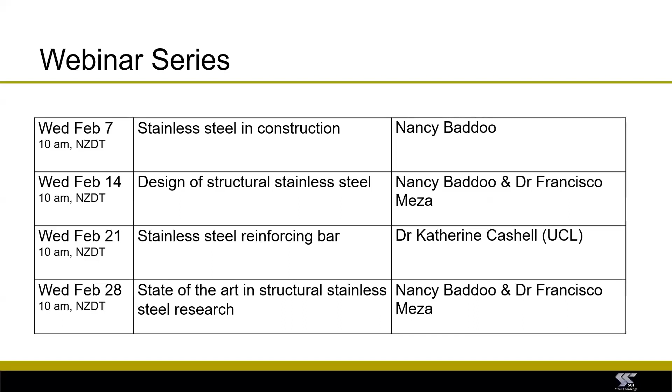A lot of what I say today you can access free of charge in the Design Manual for Structural Stainless Steel. It's written as a sort of amplified Eurocode handbook, and I know you may not be familiar with the use of Eurocodes, but a lot of the information in this guide is generic, and I think you'll find it useful. Next week I'll be talking more about the American and European design standards, and I'll bring to your attention more design tools and design information.

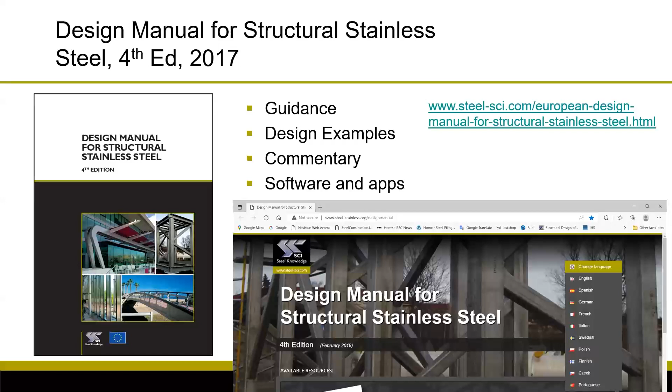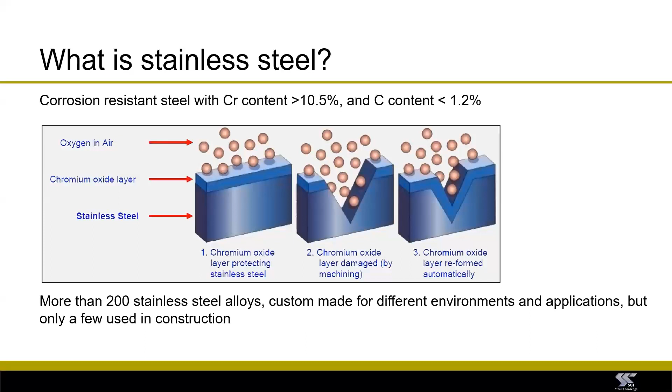Let's explain what stainless steel is. It's a family of corrosion and heat resisting alloys of steel. There's a wide range of them. In fact, you're never far away from stainless steel, whether you're in the office or at home. Stainless steels have a range of strengths, corrosion resistance, and other interesting properties. But what all stainless steels have is at least 10.5% chromium content. With that 10.5%, you get a tightly adherent layer of chromium oxide, which clings to the surface of the steel and protects it from corroding when there's moisture and oxygen. If you damage the surface by scratching or whatever, the chromium oxide reforms instantaneously.

And that's what makes stainless steel protected from corrosion. All these stainless steel alloys are grouped into 5 distinctive families that have different microstructures and mechanical, physical properties, and different corrosion resistances in various service environments. The families have different alloying combinations. We've just seen that great video on nickel—nickel is useful because it improves the formability and weldability of stainless steels. You also need chromium, and molybdenum and nitrogen, to increase corrosion resistance.

So let me quickly run through these 5 families. Austenitics are the most important for today—they're very ductile and reasonably strong. Your kitchen sink will be made of austenitic stainless steel; it's readily welded, and they work harden, so the strength increases as they're worked. Duplex—now this isn't a layer, duplex is actually the microstructure. It's a mixture of austenite and ferrite. These are stronger than austenitics, but not as easily formed.

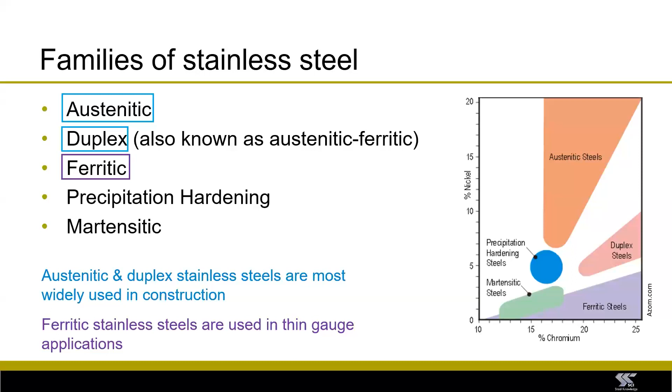The families used in construction are mainly the austenitic stainless steels. Duplex stainless steels are being used more and more now, and ferritics also find some applications. I've summarized this in this slide. The austenitics, as a family, give a wide range of corrosion resistance. Interestingly, the austenitic stainless steels are not magnetic, which you wouldn't necessarily expect. And with duplexes, you'd think about using one if you've got an application where you can exploit the higher strength—so not if your design is limited by serviceability or deflection, but if it's limited by strength, then a duplex stainless steel would be good to consider.

And as you would expect, the higher the alloy content, the more corrosion resistant the steel, and the higher the cost.

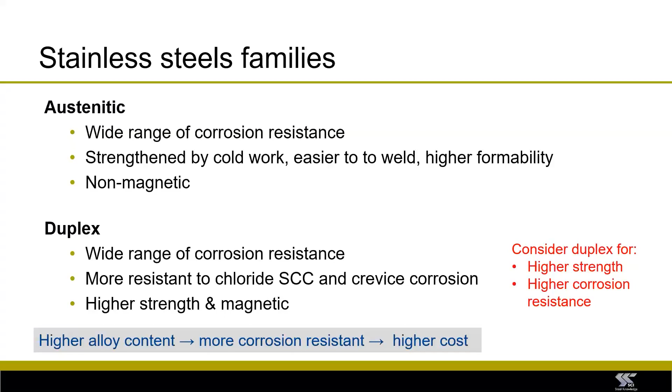On this slide, I am suggesting the reasons for using stainless steel in structures. Clearly the most common reason is if your structure is in a highly corrosive environment, or where it's important to have a long life with low maintenance requirements. Perhaps you've got an application where you really don't want a painted coating for corrosion protection, or a certain attractive aesthetic appearance is needed. Those are all reasons for using stainless steel in structures.

The less widely known reasons include if you need a non-magnetic steel, as I've mentioned, in some medical and defense applications, that's important. Also, if you need good toughness at very low temperatures, then the austenitic stainless steels are a wonderful choice. And finally, I'll show you in a few slides' time that the stainless steels offer very good impact properties for high strain rate events.

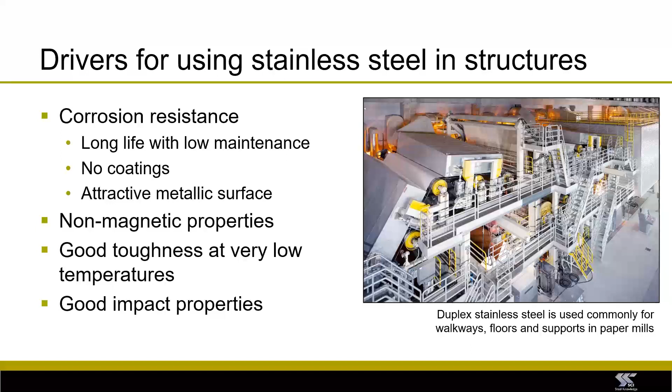We're going to go around the world now. I'm going to show you some applications. My main motivation is to show you the diverse range of applications you can find for load-bearing stainless steel components, large or small, hidden or on view to everyone.

Let's start with buildings and external structures. Perhaps you'll recognise the gap in Western Australia. That's a duplex stainless steel walkway. No need to wonder why stainless steel was needed there. Very exposed, salty environment. But this photo beneath that, you may be wondering why stainless steel would be needed.

That is because the columns for the canopy in front of the building need to have a very high impact resistance to prevent the possibility of damage by vehicle impact. So that's a duplex stainless steel structure. And the rather beautiful canopy on the right, that's stainless steel, I think, was chosen because a very fixed and beautiful surface finish, reflective finish, was needed.

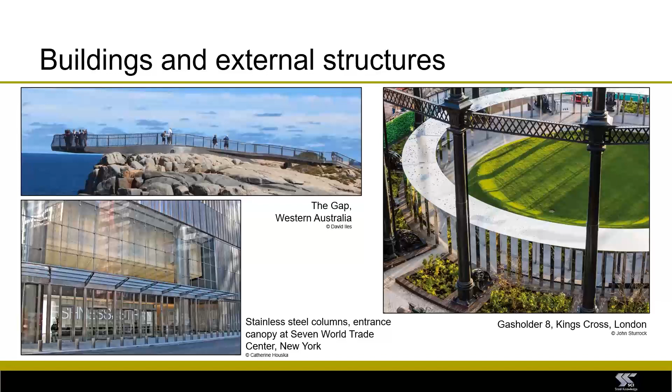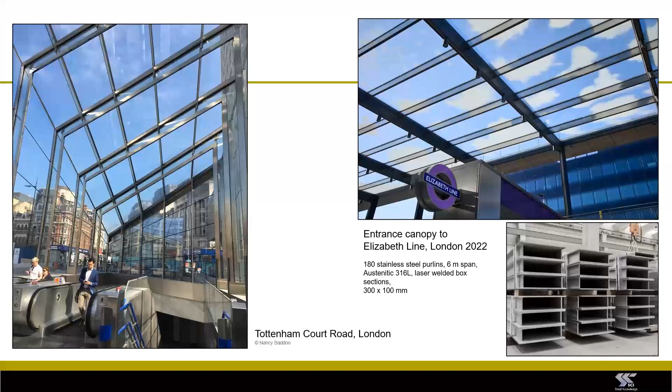And also whizzing over to the States. Here we've got 42 canopies for the Washington DC Metro, all using austenitic stainless steel. I like this because every canopy is slightly different depending on the requirements of the given station. And a modular design has been adopted. So the modules are bolted together on site and they're delivered in as large as possible modules as can be delivered. So they're rectangular hollow sections, and I think rather beautiful designs.

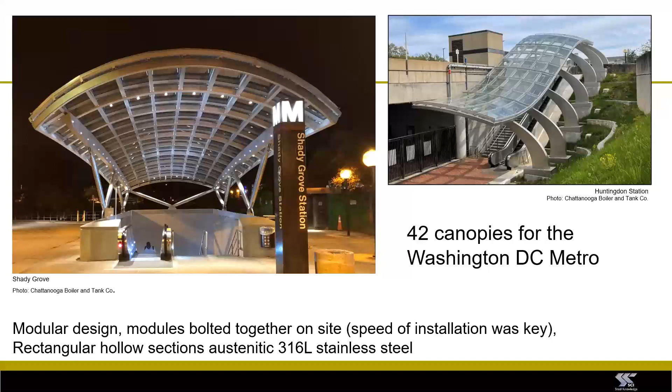I think they've commissioned more than 42 now, actually. Clearly, stainless steel is used for cladding high-rise buildings in very demanding applications. Here in Dubai, the environmental conditions can be quite extreme, strong winds, sandstorm, high salinity, and stainless steel performs very well here.

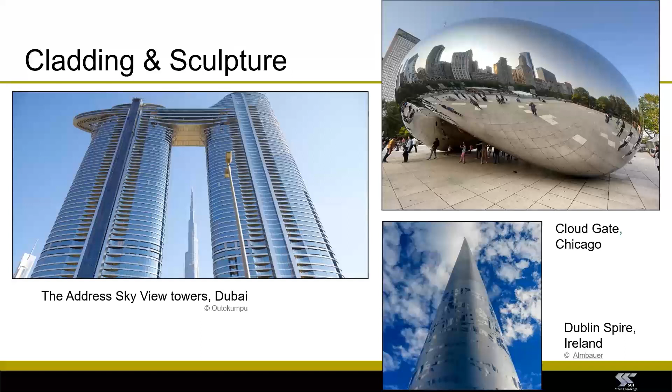And there are many sculptural applications of stainless steel too. But perhaps what you're most interested in today, I'm not sure, is industrial applications of stainless steel structures. So we don't see these every day, but the largest proportion of stainless steel goes into these types of applications.

I mustn't spend too long talking through these, but the photo on the top left, that's a biopharmaceutical production plant where all the sections are 304 stainless steel welded together. And you'd think, well, why do you need stainless steel? Well, because these clean factories, you need to carry out maintenance and inspection of the vessels, and there can't be a chance of any painted coating falling off. All the surfaces have to be very readily cleaned.

Then we have an industrial skid for machinery in the middle top, and then the top right is a desalination plant in London. And then along the bottom, walkways and platforms, lock and dam gates. And the bottom right is actually a nuclear plant, an AP1000 reactor, where you have this sandwich construction, stainless steel, concrete, stainless steel. That has been used quite a lot in plants in China and the States.

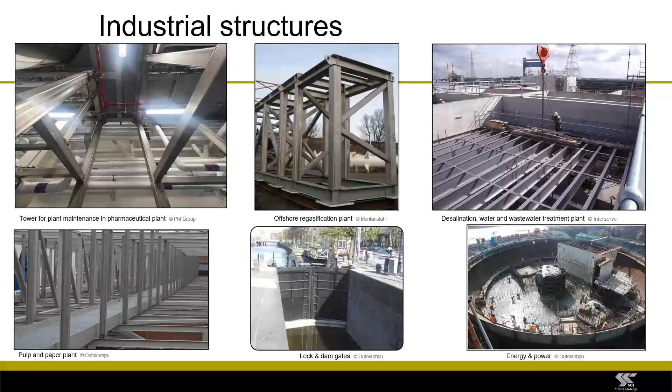What about the water industry? Well, just in November last year, we published an update to the information and guidance note on applications for stainless steel in the water industry. And although it's written mainly for the UK market, I think there's lots of really useful information about what stainless steels to use in what different environments that you would encounter in the water industry, and written by top experts in corrosion.

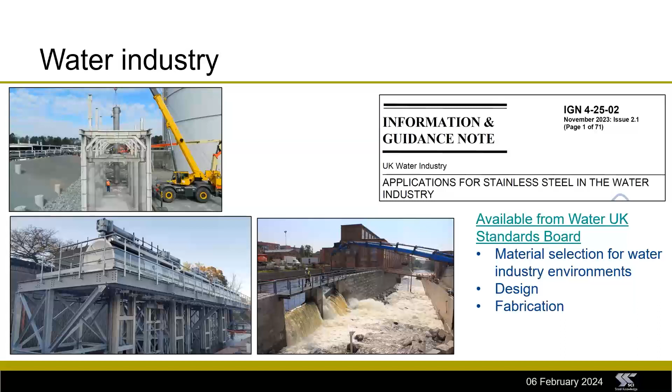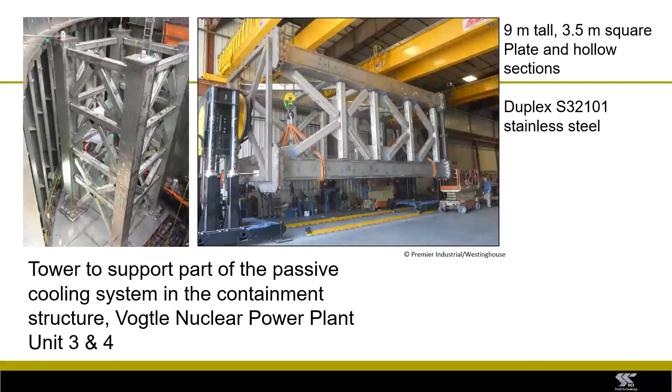Not me, I should hasten to add. I'm just a structural engineer. But if you are involved in the water industry, I suggest you download this publication, because there are lots of useful applications for stainless steel there. I just work with someone who was involved in rather impressive stainless steel tower there, pretty tall, 9 meters tall, 3.5 meters square, a duplex stainless steel.

Bridges. I'm going to talk at the end of this webinar more about bridges, and perhaps it's surprising to you to consider using stainless steel for such a large structure. But depending where your bridge is, it can actually save you lots of money using stainless steel and not having to do regular painted maintenance. More on that later. But there are examples of pedestrian bridges made of stainless steel, railway bridges, and also road bridges made of stainless steel.

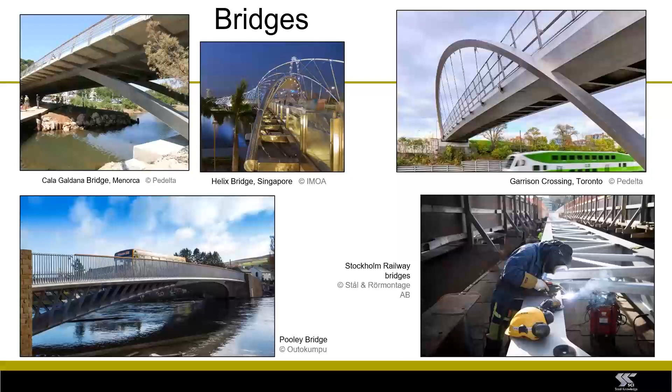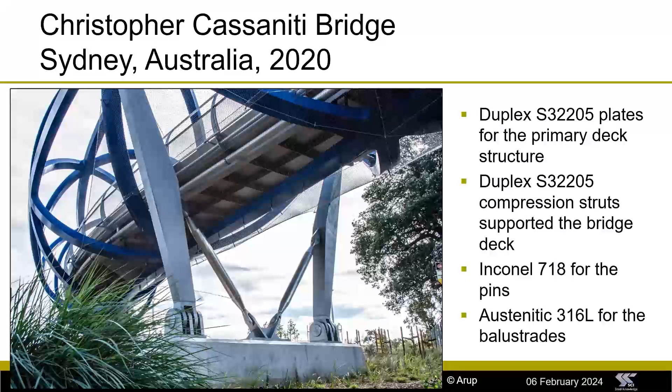And of course, I should show you a fairly new bridge in Sydney, Australia, which uses stainless steel in a few different ways. You can see there's plate used for the primary deck structure, and then the compression struts are also made of duplex stainless steel, and then a high nickel alloy for the pins with austenitic stainless steel for the balustrades. So that's quite a nice example of different stainless steel alloys.

But just in case you're worrying, thinking those bridges come along once in a lifetime, I'm not interested - just for regular bridges, stainless steel is being used. This is a road bridge somewhere in Sweden, not in a capital city, and lean duplex is being used just for a standard composite road bridge.

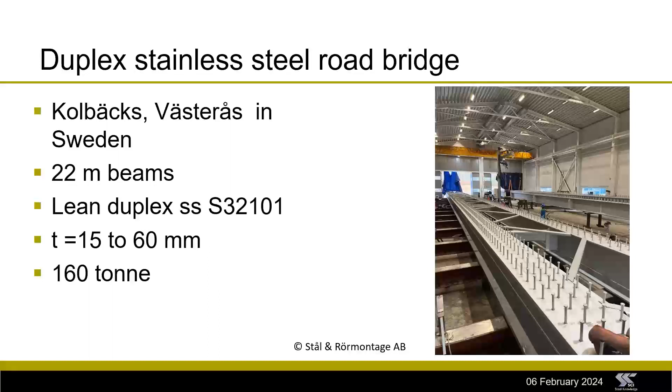And finally, on the applications, let me show you a wide range of fixings are used, because stainless steel is an important material for joining concrete, masonry, timber, aluminium, useful in renovation, repair, refurbishment, and reinforcement, all beginning with RE, fortunately. I think you'll have come across quite a few of these stainless steel products.

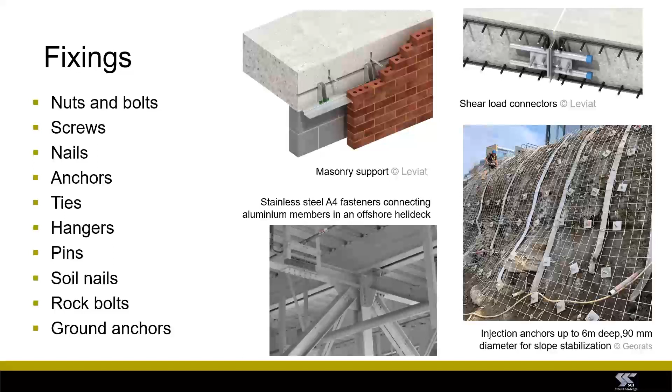Moving on to stainless steel properties now.

Here are the stress strain characteristics at the low strain. In red, carbon steel, clearly, sharply defined yield point, and then a plastic plateau. In green, I'm showing austenitic stainless steel, and in blue, duplex stainless steel. So you can see rather different stress strain characteristics. They exhibit strain hardening, which is when the strength increases with the plastic deformation. And it's gradual yielding, isn't it? A gradual loss in stiffness.

This behavior leads to differences in the performance of stainless steel beams, for example. The stiffness, modulus of elasticity, is very similar for carbon steel and stainless steel. And what we use in design, because there isn't a clear yield point, is the 0.2% proof strength, the strength at 0.2% strain. This is a conventional metric used for any metals that have non-linear stress strain characteristics like this. It's not something special for stainless steel - other metals like aluminium you would use the strength at the 0.2% proof strain. So that's what's tabulated in your product standards.

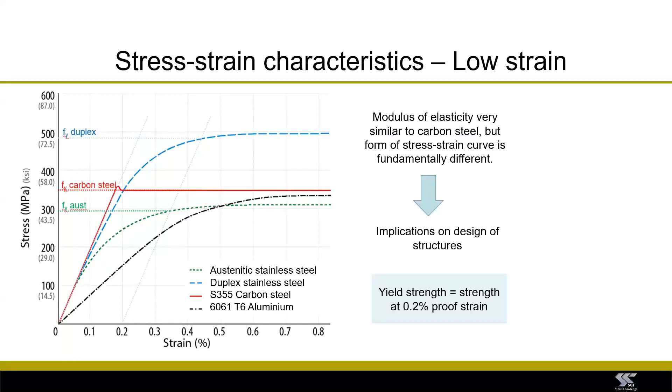These curves are the full range stress strain curves of stainless steel and carbon steel, and you can see that austenitic stainless steel is much more ductile than carbon steel, and it also shows greater toughness, which is compared to the area under the stress strain curve.

So stainless steels have better energy absorption properties than, for example, aluminium. They have a high rate of strain hardening and excellent ductility. I show this photo because the point is that the damage to the stainless steel rail cars was contained within a very localized area because of the good energy absorption properties.

So we'll think a little more in this webinar, but a lot more in the webinar next week, about the impact of these stress strain characteristics on our work as structural engineers. How do the design rules differ? And actually, can we use these characteristics to get more out of the stainless steel? Because it's more expensive, so we want to use it in the most efficient way possible.

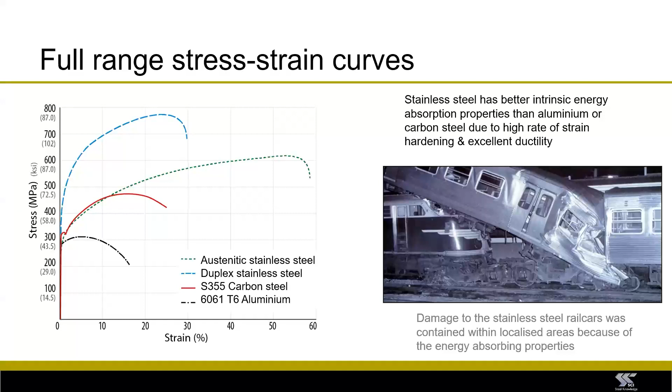On this slide, I've summarized the mechanical properties. For carbon steel, I'm comparing against an S355 carbon steel. Austenitic stainless steels have a lower yield strength, 0.2% proof strength, and the duplexes have a somewhat higher yield strength. The tensile to yield strength ratio, for carbon steel and duplex stainless steels, is pretty similar. For the austenitics, it's much higher, around 2.4. This is because of the strong work hardening. The elongation, again carbon steel and duplex are similar, and the austenitics have about twice as much elongation.

These properties are in the annealed condition. You'll hear this strange word a lot with stainless steel, but it's used to describe the properties in the softened state, they will never be lower than the annealed condition, and they'll more or less always be higher. If you buy some stainless steel plate, for example, it will be extremely surprising if the yield strength is as low as 220.

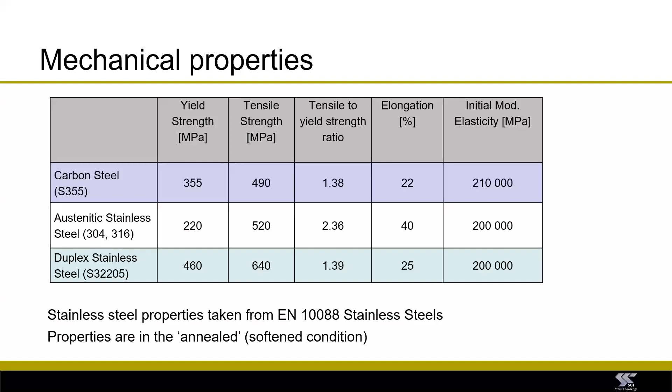Let's think about physical properties now. Here I've compared the thermal expansion and the thermal conductivity. The density is more or less the same, as you can see. For expansion, the austenitics have about a 30% higher expansion than carbon steel. So when you use carbon steel with austenitic stainless steel, you should take into account the differential thermal expansion in design.

Conductivity is different again. Austenitic and duplex stainless steel conductivity is only about 30% that of carbon steel. This is good and this is bad. Materials with low thermal conductivity prevent the transfer of heat, so this helps in achieving enhanced energy efficiency. For example, lower thermal conductivity makes stainless steel ideal for developing thermal breaks. But it's also a disadvantage, say, in welding, where you may get more distortion because the heat isn't conducted away as quickly or efficiently.

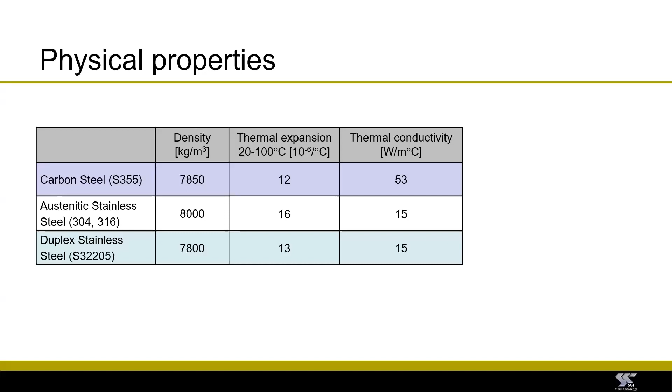Now let's finish off the properties section with this slide on low temperature toughness. I think what you'll notice is austenitic stainless steels actually show no ductile to brittle transition. Isn't that interesting? So you can use, and indeed they are used, right down to cryogenic temperatures, for example, for LNG containers.

Duplex stainless steels, just like carbon steels, have a ductile to brittle transition. It's similar-ish to carbon steels. There's been a lot of work on this recently because it's an important parameter to fully understand, and there is complete and comprehensive guidance now in the forthcoming Eurocode for duplex stainless steels on low temperature toughness.

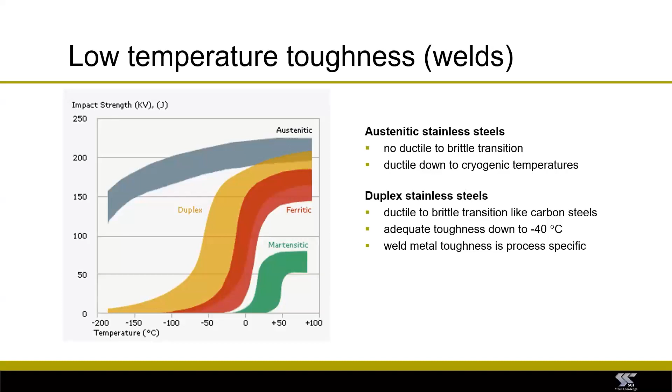Good. Now we're going to move to specification. And I want to try and explain the way stainless steels are named. This might look horrifying to you, but depending what product standards you're using, the same alloy will have a different designation system.

In Europe, for example, we use this number like 1.4301. Also, the European standards give this very complicated name for each alloy, but no one I know has ever used that, so you can forget that.

Now, in your part of the world, you would be using the American ASTM designation system, because I checked that in the Australian New Zealand standard 4673, which covers the design of cold form stainless steel structures. I checked how you designated your alloys, and for the austenitic alloys, this standard covers 304, 304L, 316, 316L. So these are there in red.

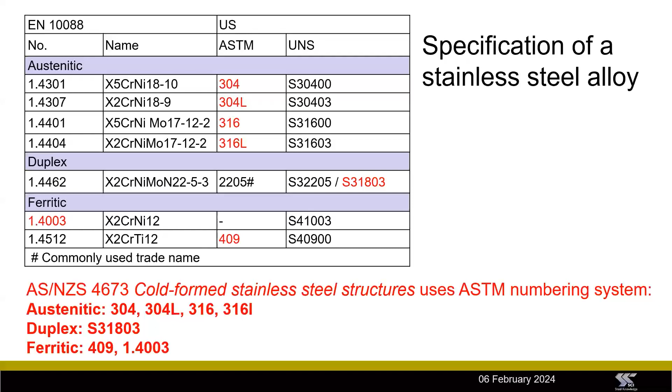And then your standard also covers the ferritic stainless steels, 2 alloys, 409, using the ASTM system, and it covers another ferritic alloy for which there isn't an ASTM. Actually, I'm not quite sure why, but it was decided to use the European number for that one. But anyway, hope that's all obvious to you. For this presentation and the rest of our presentations, we will be using the ASTM system.

When we use the term stainless steel grade or type, we mean an alloy, a chemical composition. We're not talking about strength. Now, this is confusing if you're familiar with American standards, because they talk about steel grade 50, and 50 is the strength, isn't it? It's 50 KSI yield strength. But that's not the case for stainless steel. When we use grade or type or alloy, we mean the chemical composition. And I try to use the term alloy, but forgive me if I drop back into grade.

The other thing I wanted to explain is what this L is up to, because you've already seen 304 and 304L. So L stands for low carbon. And low carbon grades used to have to be specified if you were going to carry out welding, because having a low carbon minimized the risk of a certain type of corrosion happening, sensitization. Now, these days, more or less all stainless steels that are made actually end up low carbon.

And so you see something called dual certification. You'll see the alloy written as 304, 304L, and that provides the material with the higher strength. 304 has a very slightly higher strength than 304L, and it has the lower carbon content of 304L. So what I mean is it's the best of both worlds. So don't be surprised if you see austenitic stainless steel dual certified like that.

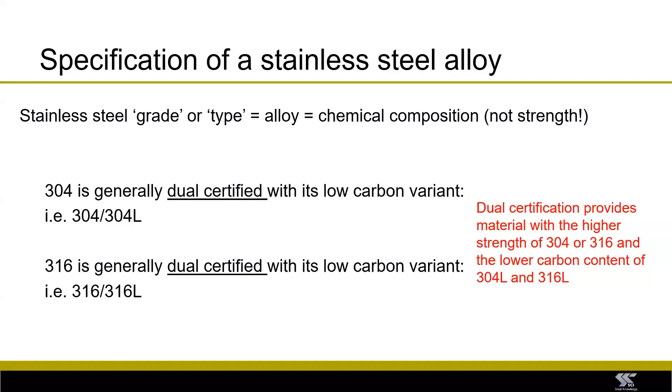The first thing you have to do is understand the environment. If it's atmospheric, what's the chloride salt deposition? Is it close to the sea? Are there de-icing salts? Are there other nasty pollutants? Is it washed by the rain? Or is it sheltered? Will it be cleaned?

If your application is immersed, what are the chemicals? What's the composition of the liquids? If your application is in an industrial process, are there sulfides? What are the other chemicals, etc.?

Once you've characterized the environment, then you need to think of your design requirements. What surface finish do you want? Will there be lots of crevices? What are the design details?

From that, you can move on to select your candidate alloy. And then, of course, you have to think, well, is this product actually available? And what's the lead time? So these are the decisions that have to be thought through before you get onto the structural engineering, before you decide, right, I've got a duplex, this is my 0.2% proof strength, let me get on with determining the buckling of this member.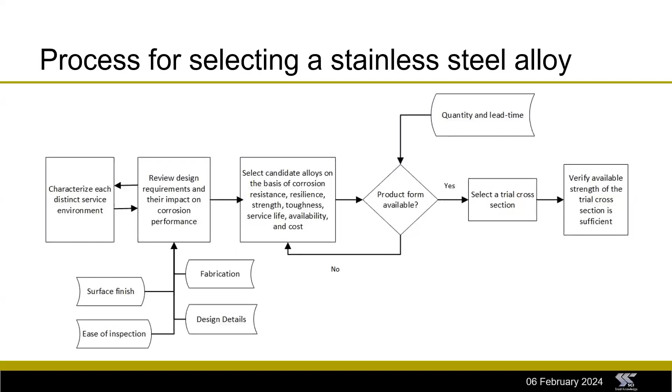Now, there's lots of guidance about how to select the right alloy for an application, and I've put a couple of ideas here. We'll talk more about the AISC standard next week. There's a very useful system on the IMOA website, the International Molybdenum Association website. Lots of very helpful guidance there too.

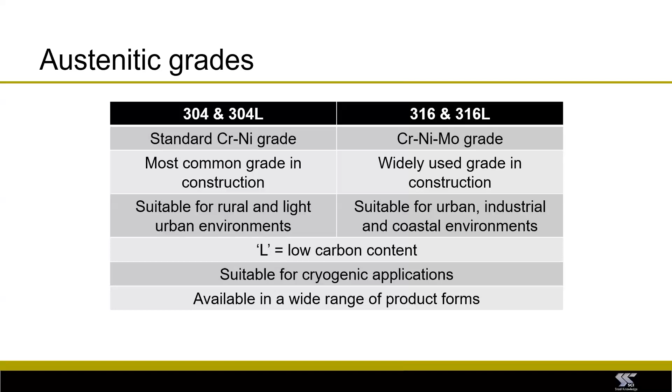Let me whiz through these just to highlight that the 304 alloys are the standard chromium nickel alloys. The 316 alloys have molybdenum, which makes them more corrosion resistant and more suitable for applications, for example, by the sea. Austenitics are widely available in a range of product forms.

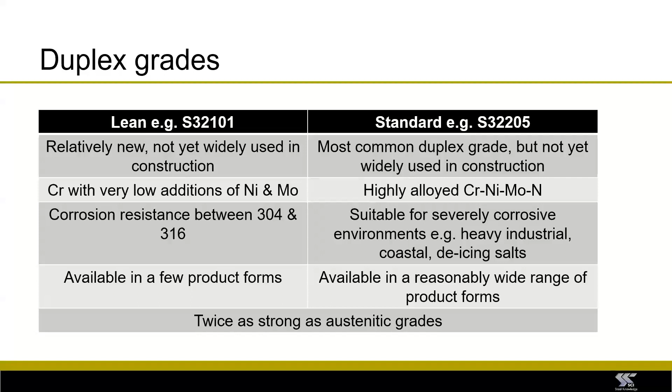The duplexes, we have the lean duplexes, which have lower alloy additions, that's why it's lean, and then we have the standard duplex. Standard duplex has been around for years and years in the chemicals industry, available in a wide range of product forms. The lean duplexes, in the last 10 years, have been found to be tremendously helpful, and they're increasingly used.

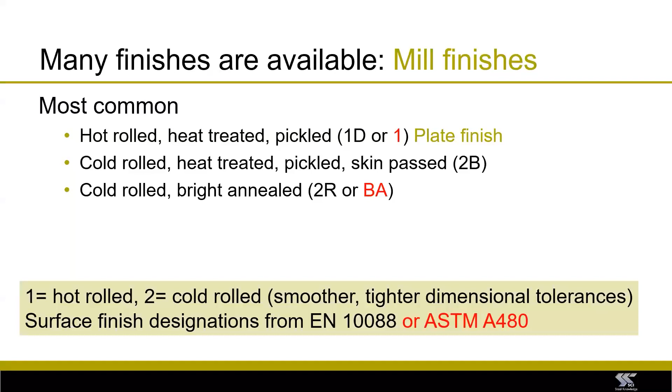A few thoughts on finish. Clearly, mill finishes, you have a 1D or a 1 finish on thicker products. If you've got thinner material, then it would generally be a cold rolled finish. These are all specified in the product standard. You can have special finishes, whether ground, right up to bright polished, patterned, coloured.

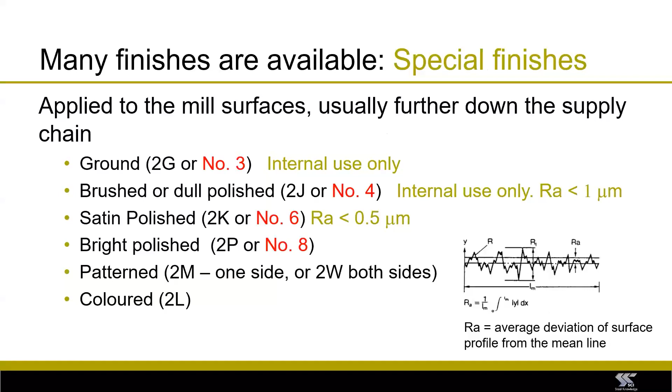The important thing is that you shouldn't just specify, I don't know, I want a 240 grit, because that depends on the belt, the pressure, the speed of operation. It is better to specify the RA value and be more precise about it. And I hardly need to say, but the finish has a significant impact on the corrosion resistance.

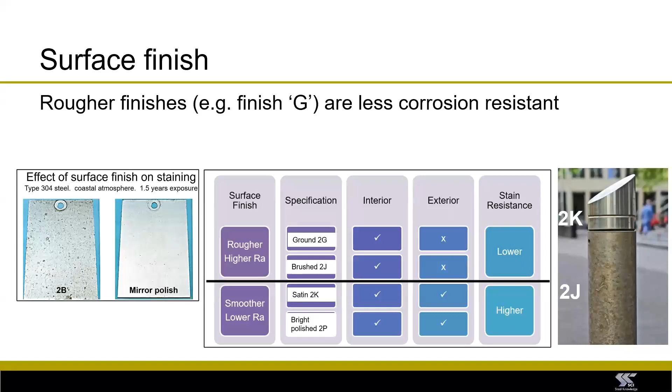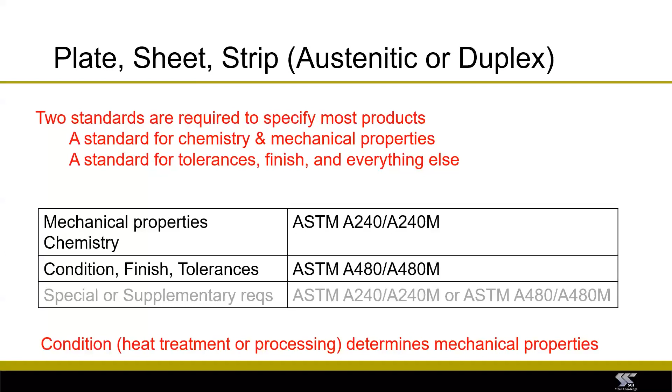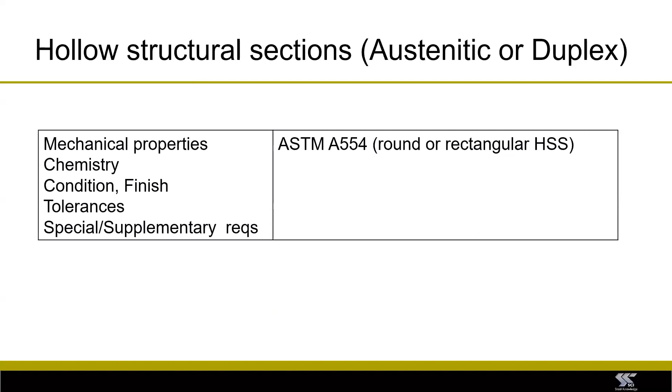A range of structural products is available in stainless steel, and so you need to pick the right product standard. In the world of ASTMs, you need 2 standards to specify most products: one covers mechanical properties and chemistry, and one covers condition, finish and tolerances. These are the ASTMs for flat material. Then you have different ASTMs for bar and shapes, and another different ASTM for your hollow sections.

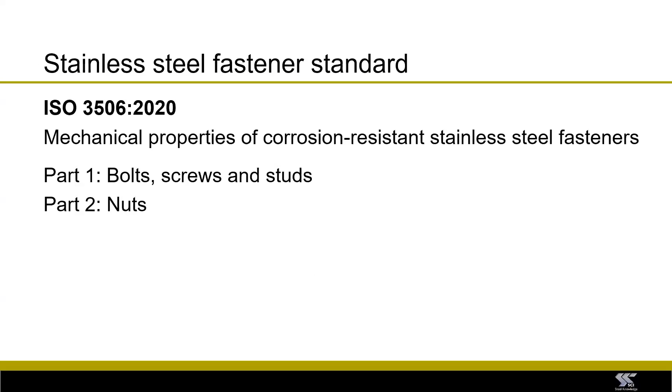What about fasteners? Well, here they're specified to ISO 3506. Part 1 covers bolts and Part 2 nuts. Let me just explain the numbering system, because it's sort of annoying, but it doesn't use the same designation system as the flat material. First of all, you start off with a letter A for austenitic. Then you have a number which defines the corrosion resistance, so A2 is equivalent to a 304, or A4 moves you up to a 316. And then the final number, be it 70, 80, defines the property class, so that's the strength.

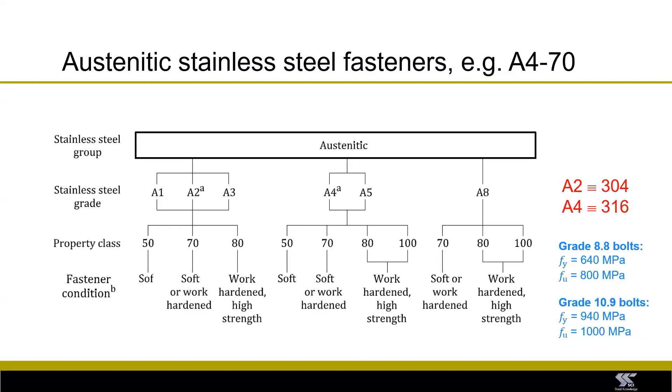So property class 80 means that the tensile strength is 800 megapascals, so very similar to a grade 8.8 bolt. Property class 70 and 80 are very widely available. Property class 100 is newer, so that's not as widely available. But typically you'd use an A270 or an A470 or 80.

Exactly the same system for duplexes: D for duplex, D2 and D4, these are the sort of lean duplex grades. This is all explained in ISO 3506, and D6 is the standard duplex.

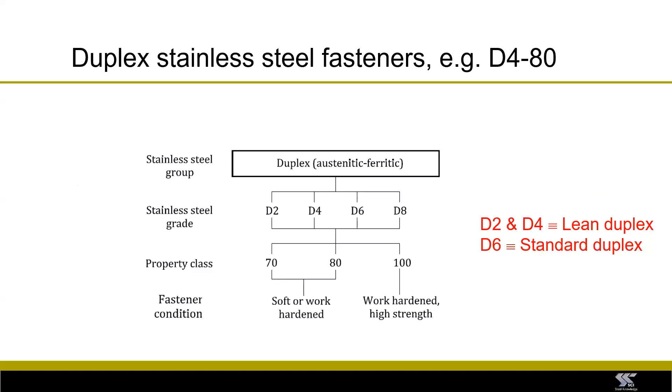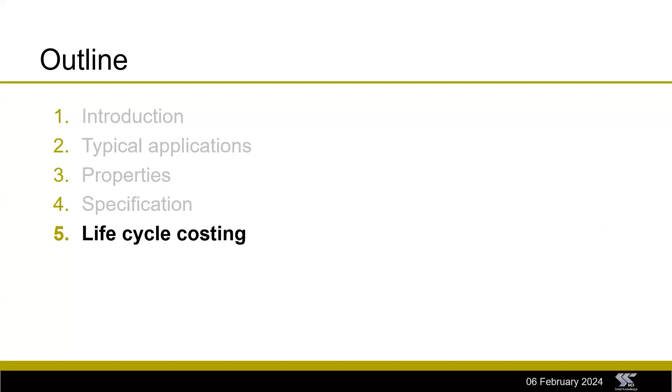I've finished specification, and now for the remaining 5 or 10 minutes, I wanted to tell you about a project that we carried out at SCI over the last, well, it actually took us 2 or 3 years. This was the purpose of the project: to compare the construction and life cycle cost of a duplex stainless steel highway bridge, and to compare it against an equivalent carbon steel bridge.

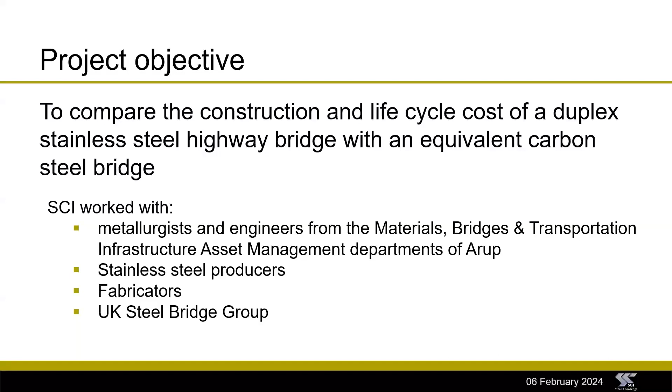And we worked with teams from Arup, from the materials, bridges and transportation, infrastructure, asset management departments, and we worked with some stainless steel producers, fabricators, and the UK Steel Bridge Group.

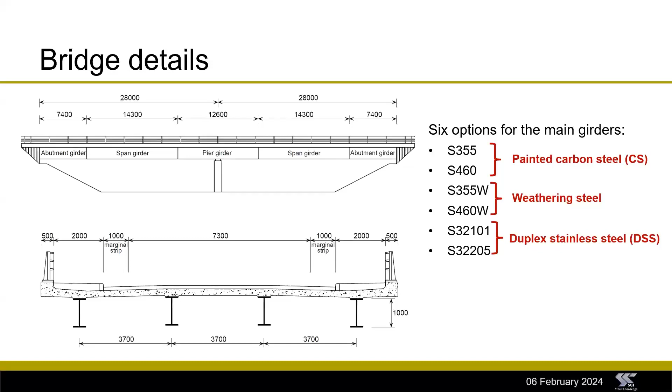So we looked at carbon steel painted, weathering steel, and duplex stainless steel. We did the design to the Eurocode. So I'm showing here some of the connections and the bracing and stiffeners.

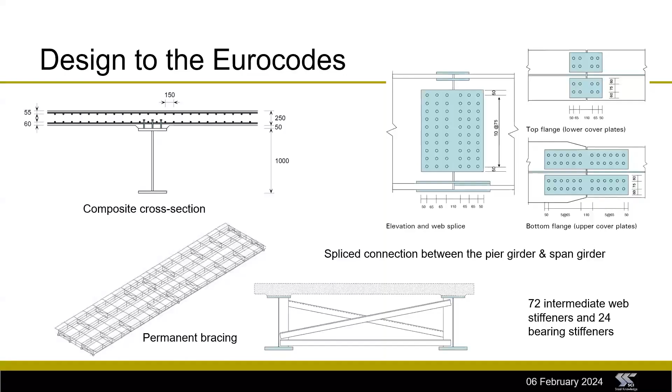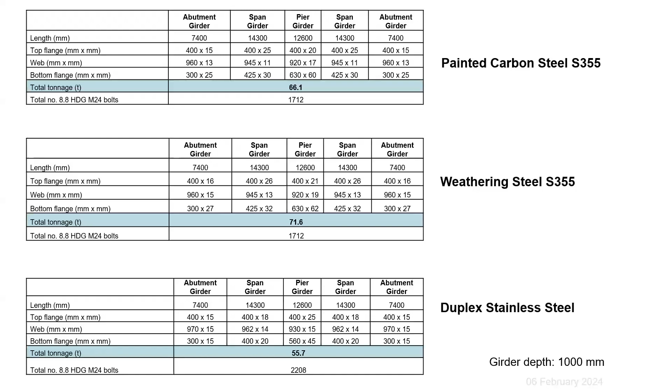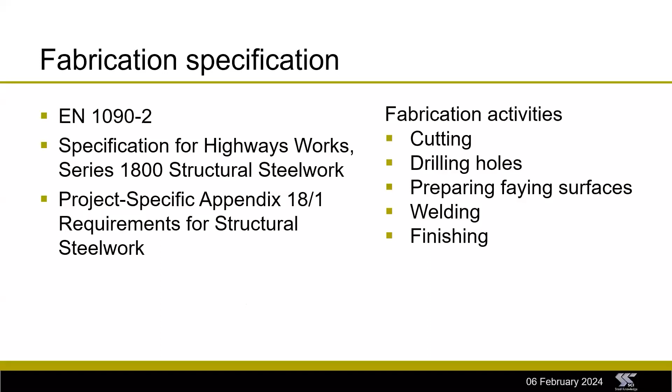So that was the easy part, designing the bridge. Then it got a bit more challenging because we defined a fabrication specification for the three bridge materials, again using the European fabrication specification and what the Highways Agency requires in the UK for bridge structures.

Then we went out to tender to get realistic fabrication costs, and this got a bit tricky because it was impossible getting direct comparisons. We were comparing apples with pears rather than apples with apples, because we really needed quotes from one fabricator in the same country using the same assumptions. This proved difficult because stainless steel bridges are a fairly new market, and many carbon steel bridge fabricators haven't yet used stainless steel.

So in the end we decided to make an intelligent assumption about the cost of fabricating the duplex bridge, rather conservatively. We did upper bound and lower bound, guessing it might be between 30 and 70% more expensive than fabricating an equivalent carbon steel bridge.

Why? A few reasons. You need a dedicated fabrication area and higher standards of cleanliness. Welding is a bit trickier with duplex because there's more movement, more spring back, and you have to tightly control the temperature during welding, so there'd be extra costs for preventing or correcting distortion. You also have to use non-carbon steel tooling.

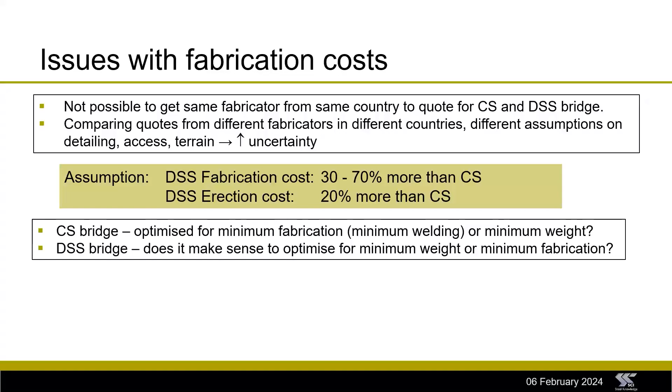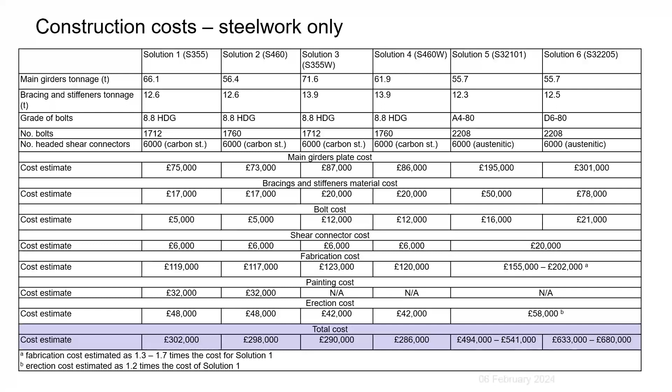Let's move on to construction costs. Here we have the costs for the carbon steel bridge, around 300,000, very similar for the weathering steel bridges, and the stainless steel bridges significantly more expensive, which was no surprise since stainless steel is more expensive than carbon steel when comparing ton by ton.

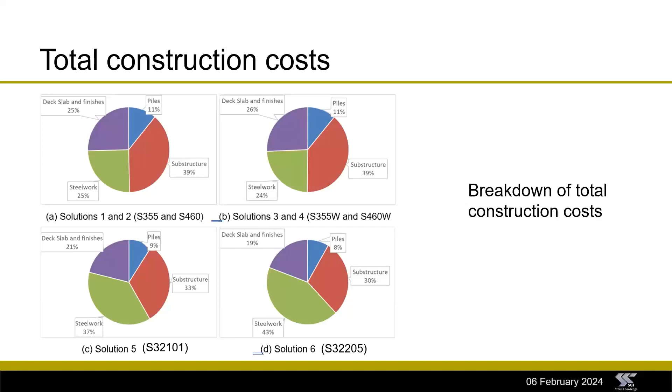So what can we conclude just looking at construction costs? The lean duplex was about 80% more costly than the painted carbon steel, and the standard duplex was more than double. Considering the steelwork only, relative to the total bridge, the lean duplex was about 20% more and the standard duplex was about 31% more.

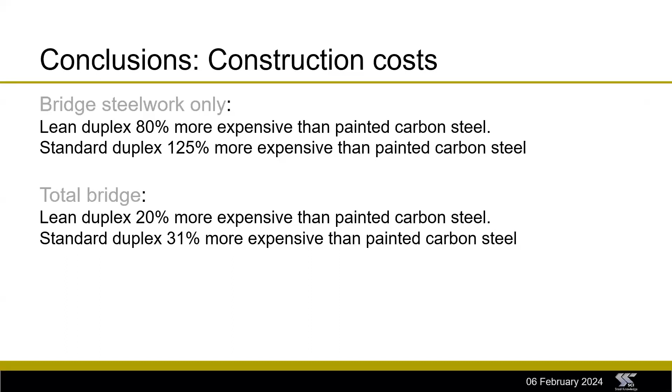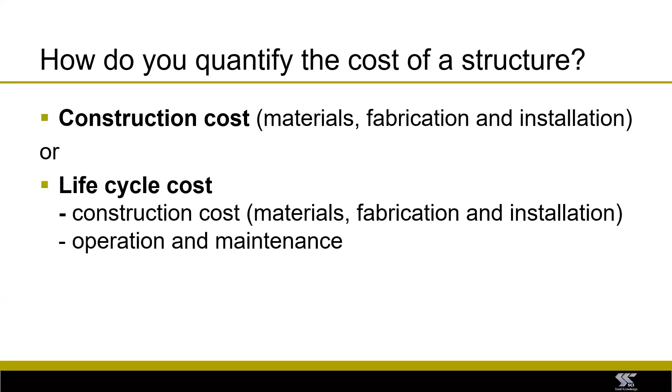Life cycle costing considers both the cost at construction and operation and maintenance throughout the life of the bridge. To define maintenance, we had to come up with some locations, so we chose four: a bridge over a main road, a bridge over a railway, a bridge over a railway near the coast, and a bridge over an estuary. Each of these had different levels of maintenance difficulty.

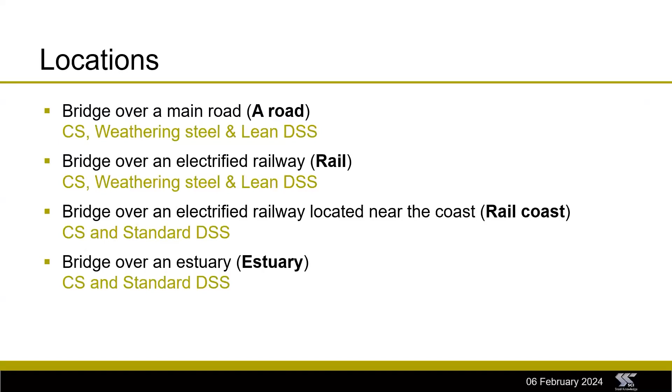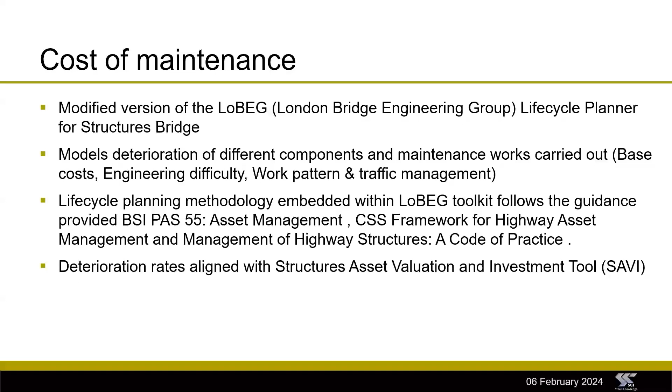This is where we worked with the Arup Asset Management Department, since this was well outside our expertise, using the software tools they use to plan life cycle costing for their structures. This was based on a very complicated spreadsheet originally from the London Bridge Engineering Group, which modelled deterioration of different components and maintenance works, etc. By the way, this is all detailed in a freely available report - if anyone's interested, I can send it to you.

We assumed a service life of 120 years, which is what might well be assumed in the UK - I'm not sure what it is in New Zealand. We assumed the bridge carried a local road with low annual average daily traffic, with nominal maintenance every 10 years for principal inspection and miscellaneous repairs. We assumed the duplex stainless steel and weathering steel clearly didn't require any repainting, so they didn't need maintenance for 120 years.